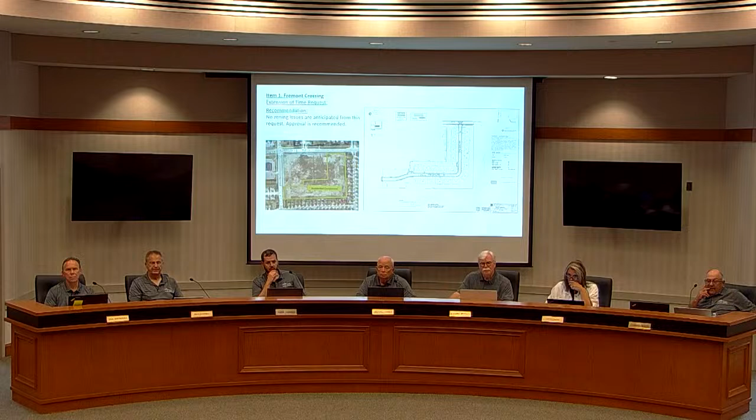So we have the road commission permit, we have the Macomb County Drain Office approval permit, and then obviously all the on-site permits, which will start to funnel in now that the engineering is, I think, in the final stages of revision. So the on-site water main permit, sanitary sewer permit, drain tap permits, some of that ancillary stuff, as you know, Mr. Spatafora. Okay, thank you. Yes, sir.

Okay. Mr. Tuckfield? Yeah, Mr. Chairman, just briefly, Mr. Izzy, obviously we're going for 2 years, which is our max. Do you feel comfortable you'll be done within that time? Or comfortable you won't need another extension, or you think you will need another one?

What I know today, if it ever stops raining, I think we should be well under development before the 2 years is up, and we're not worried about economy issues right now. As these projects get approved, we knock them off the list, we get them done. Like I said, we need inventory, unless short of something very drastic happening in global politics or whatever.

I feel very comfortable we're going to move forward with this project, and we should not be asking you for another extension. And if you choose to extend this tonight, thank you in anticipation of that. Okay. All right. Mr. Bentley?

The current drawings that we have, Mr. Box, or at least I can't tell, they don't seem to reflect the enclosed ditch, nor the widening of 21 Mile Road. Is that correct? Are those drawings to be modified before you can get your permits or finalize your permits? To me, yes, I guess. So

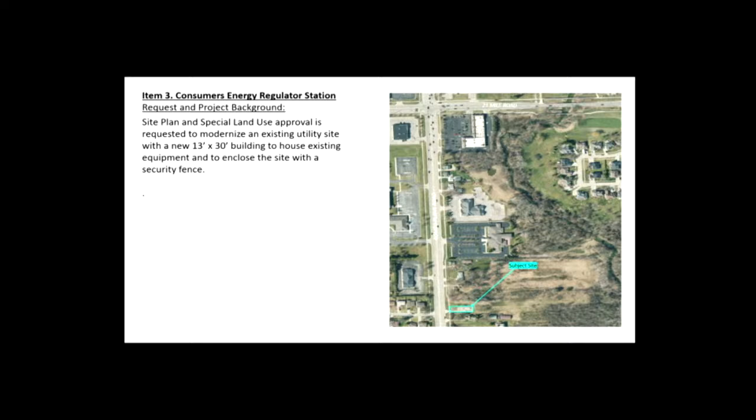It's actually a parcel that would be considered a non-conforming piece. The consumer's substation already exists. They're just making some upgrades for health and safety for the site. I'm sure they'll be happy to talk about that when they come up to the podium. Staff has looked at this site plan. They did come in and get a couple variances, which I'll talk about later. So there's two items to look at: the special land use as well as the site plan.

Even though the site already exists, we found no record that it ever went through the special land use process. So since they're here, we're cleaning that up. It is a special land use that would be required.

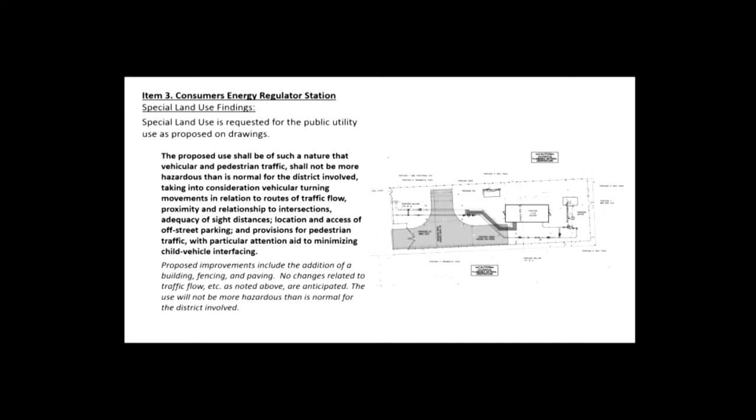The site is already developed as a public utility, so it would continue to be harmonious, which is one of the 8 criteria with the neighborhood. Proposed improvements include an addition of a building, fencing, and a little paving. There's not really anything that would anticipate a change in traffic flow, nor would it be any more hazardous than it is already.

No nuisances are anticipated resulting from noise, fumes. The Planning Commission will have some determination as to whether or not they would allow the large amount of gravel on the site.

An 8-foot high fence was considered and denied by the zoning board. Some of the drawings, or I think all of the drawings that are in the packet, still show the 8-foot fence. So should this be approved this evening, it would need to be contingent on an update to those drawings to show that fence is 6 foot.

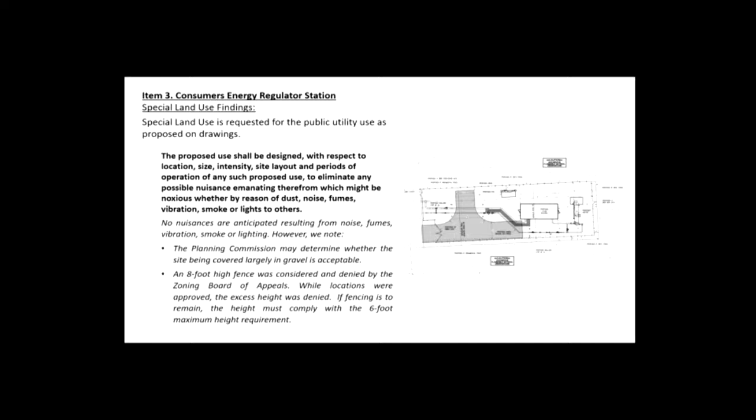The proposed use needs to be such that the height of the building structures will not interfere with or discourage appropriate development. Again, it's essentially a shed that they're building around an existing facility. The proposed use shall relate harmoniously with physical and economic aspects. Again, it's not really applicable. The site already exists; they're just making some upgrades to the site.

And the proposed use is necessary. You could say it's not applicable, or it is necessary. Consumers provide services to users all over Michigan. It's designed, located, and planned to operate in such a manner that it will not impact the public health, safety, and welfare, which is really the impetus of this update. They're trying to create a safer condition for their facilities.

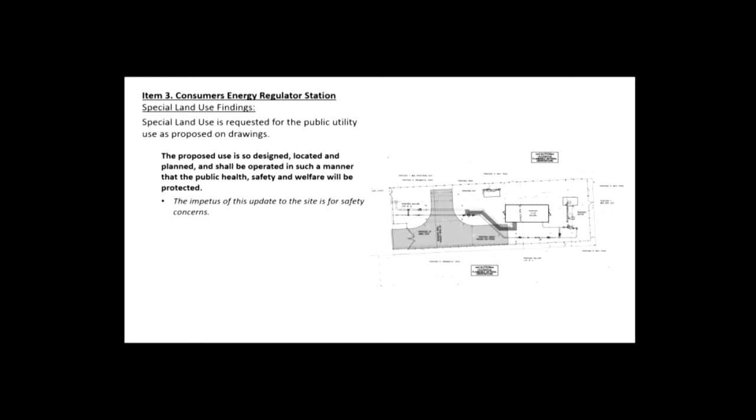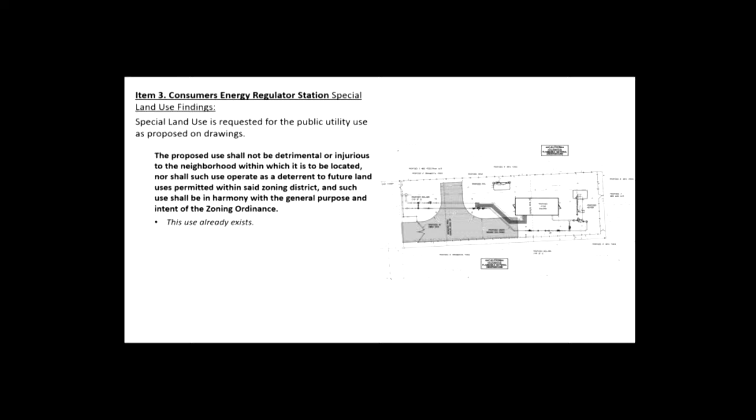The proposed site shall not be detrimental or injurious. Again, it already exists, so staff didn't really see any way that this would cause it to increase that. So with that said, we are recommending approval of the special land use.

Again, the Planning Commission does have some authority to take a look at the ground cover as acceptable, meaning the amount of gravel, as well as we think that an approval should be conditioned on updating the drawings to show the 6-foot fence. Looking at the site plan itself, they do meet all appropriate setbacks.

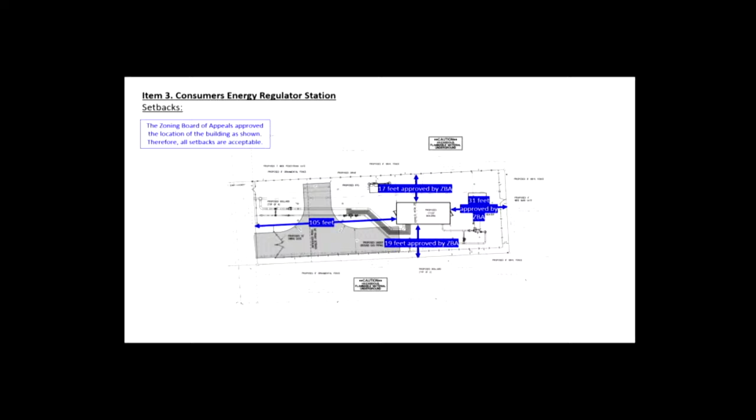They did get a variance, so with the variance that they received, they meet all required setbacks. They are showing that their 8-foot sidewalk already exists. The site will continue to be accessed in the same location. They're paving the drive. No parking or loading is required for this use, therefore they're not proposing any.

The Planning Commission, as I mentioned before, may determine whether it's acceptable ground cover. There's a large amount of gravel, as you saw in the drawings. Essentially everything that's not paved, they're proposing as gravel, which the Planning Commission would have some purview of whether or not they find that acceptable.

Screening, they're proposing an 8-foot ornamental fence in the front. Again, that location within the front yard was approved by the ZBA. However, the height was not. So the height of the fence is required to be a maximum of 6 feet tall.

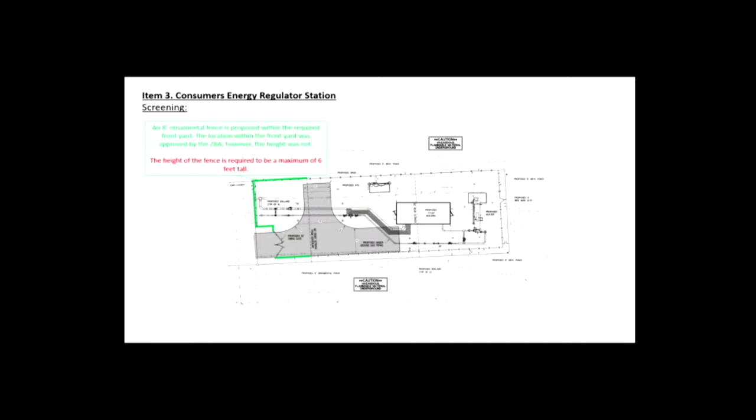So that's the area in green there that I was talking about. They'll need to update the drawing for that location. An 8-foot vinyl fence, which would be in the side and rear, would be allowed if it had been approved. However, the 8-foot was not approved, so the height of that area would also need to be updated. But this is a vinyl fence.

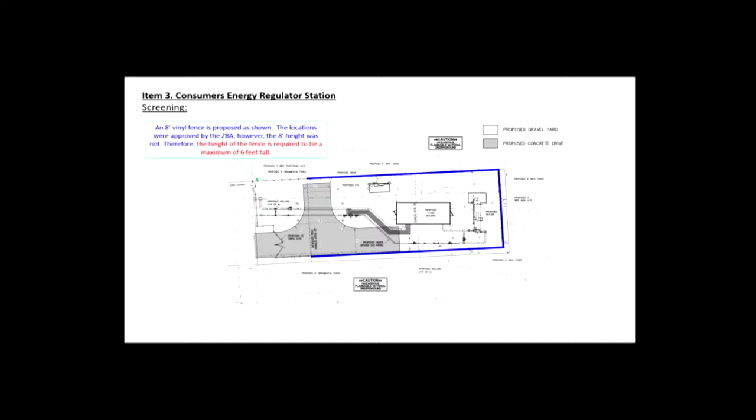I'm going to go back a slide. This area in green is an ornamental fence, and in the rear is a vinyl fence. Both need to be revised to show 6 feet. Elevations were shown in your packet. The building will be constructed of metal.

At this time, site plan approval is recommended, again conditioned upon the update of the drawing with the height of the fence and the fact that the Planning Commission is accepting of the ground cover. Staff does not have concerns with the ground cover or the gravel, but again, that's in your purview.

Okay, is a petitioner in the audience? Come on up, gentlemen.

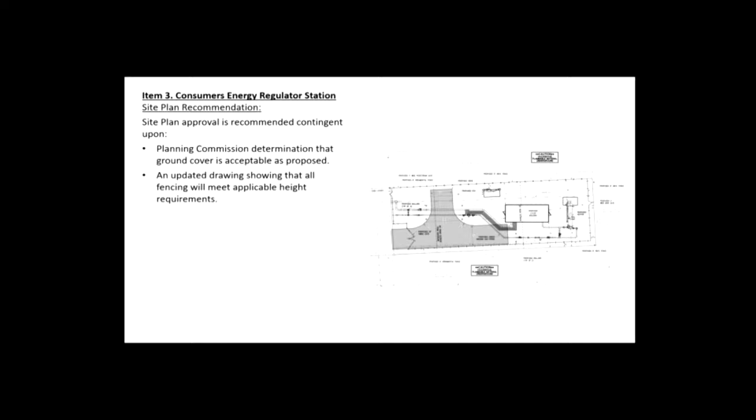They could exit out the back. And we did choose to leave it that way after the setback of the fence in case there's development sometime in the future, based on our discussions with the planners. We have spoken to the landowner who's here tonight. He mentioned that we could at this time exit out in an emergency situation to the east. It is a little wet out there right now, but it's essentially for egress in emergency cases.

In the case that, for whatever reason, it was developed with a different property butting up against us... So you're wanting to exit and stay on your property? Correct. Go south, and then out towards the road going west? Yes, sir. Without going on somebody else's property. Right, I see.

We were given a letter, it was part of our package as well, that a new layout or an agreement was being formed by you and the owner, or between you and the owner. And I guess I anticipated that those new requirements would be addressed this evening, or at least they would be brought forward.

I guess, are you referring... Bruce R. Nichols. Yeah, you're referring to the letter that the neighbor, who I believe is in the audience this evening, provided as the reason for the postponement, or one of the reasons. It was a letter in opposition, for the most part, to the fence being put up. Oh, is that right? Okay. I mean, I don't want to speak for him. If he wants to get up and answer questions, again, I think he's here in the audience, so.

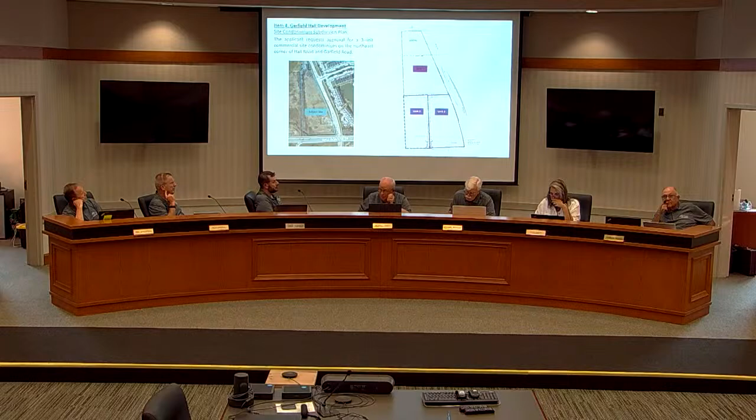Thank you, Mr. Chairman and Commission. You may recall this came before you a few months ago as a conditional rezoning, which was approved. So that being said, they're here with their site condo subdivision plan. As you see, it will be a 3-unit condominium. What they're getting approved this evening, should you approve it, is just the common area, common elements, the shared roadway, shared drive, some sidewalks.

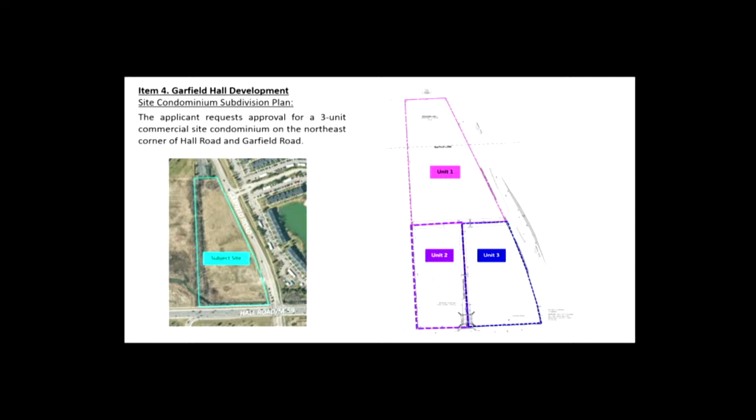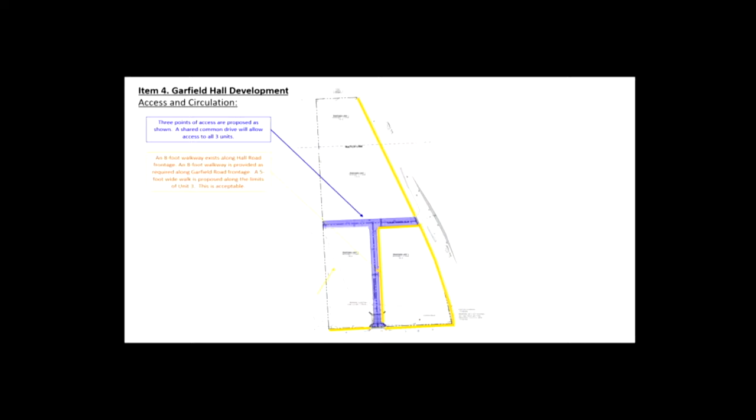I'll walk through those. But for point of clarification, each unit would come back later with their own site plans. So they've shown, as I mentioned, there are 3 points of access, one on Hall, one on Garfield, and one that's stubbed for a future access to the property to the west. The 8-foot walkway exists along Hall, an 8-foot walkway is provided as required along Garfield Road, and a 5-foot wide walk is proposed along the limits of Unit 3.

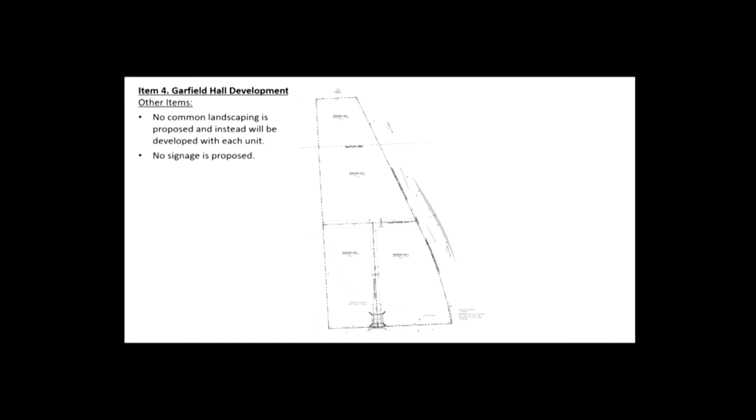The dimensions do match what was in the conditional rezoning and what was approved in that concept plan. No common landscaping is proposed. Instead, each unit will be providing their own landscaping when those are developed. Same with signage - no signage is proposed here; those will be on the site plans for each individual unit. With that being said, the site condo subdivision plan approval is recommended by staff.

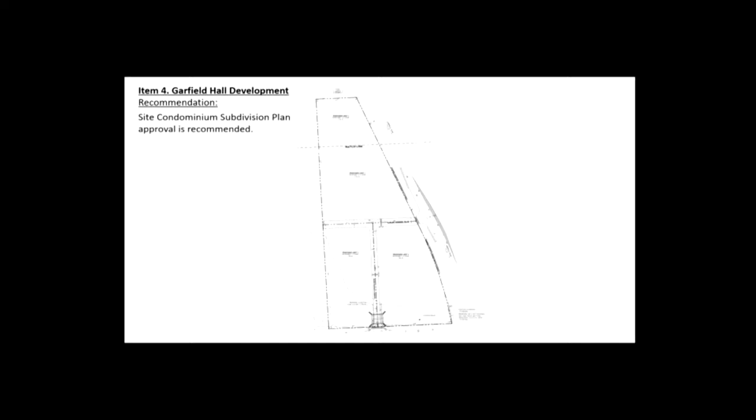Okay. Is the petitioner here? Good evening, sir. State your name and address for the record for us, please.

Good evening, Eric Williams with Stonefield Engineering Design. Address is 555 South Old Woodward, Birmingham, Michigan. I think Josh summed it up. I do also have Clint Mansour and Steve Calabat in the back here, they are the developers of the project. But I believe Josh summed up what we are seeking tonight, simply the common elements of this development.

So we do have direct access to Hall Road via, I'll call it a bridge, but a culvert crossing more or less, and access to Garfield to the east. I would point out there are going to be some roadway improvements there based off conversations with the engineering department along with the County Road Commission. We've been in continuous communication with those folks. You'll see a right-hand turn lane as you go southbound on Garfield, and on the east side of the road there will be a left turn bypass - essentially if somebody's taking a left turn into the property, there will be another lane east of that to allow vehicles to continue north unrestricted.

Beyond that, as Josh mentioned, we will be returning for additional applications for the subsequent units. I know one of them is under review now, and I believe the other couple are in short order here. Other than that, happy to answer any questions and appreciate everybody's time.

Okay, Commissioners. Mr. Bentley - I didn't even say anything. So I do have some questions regarding the site.